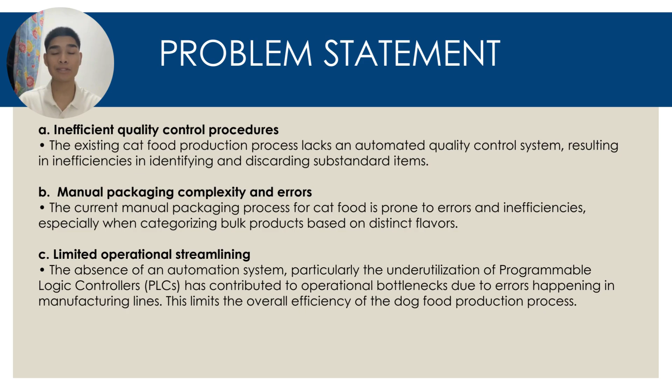Third is the problem of limited operational streamlining. There is a lack of automation, especially with the underutilized PLC system. This causes bottlenecks and errors in the production line, reducing efficiency and slowing down the entire workflow. Overall, these problems highlight the need for a more reliable and automated system to improve quality, reduce errors, and optimize the production process.

For this project, we have outlined several key objectives focused on improving the food production process using automation. Firstly, our goal is to implement PLC automation to control multiple stages of the production line, including sealing, quality control, labeling, and sorting. This will reduce human error and improve efficiency.

Secondly, we aim to integrate PLC technology into the packaging process, allowing the system to identify and sort food based on distinct flavor, categorized using different package colors. Third, we strive to enhance overall operational efficiency and safety, ensuring consistent quality across all output.

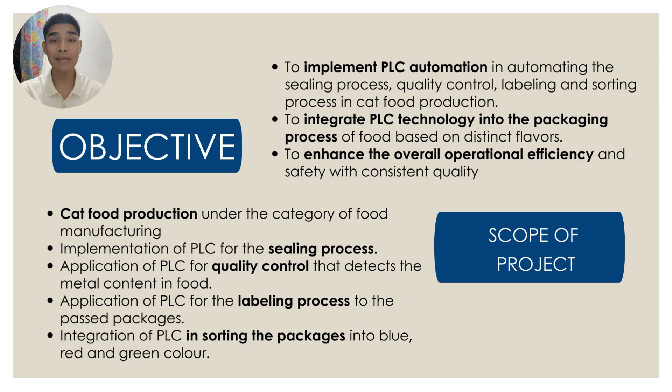To break this down further, this project falls under the scope of food manufacturing. PLCs are used to automate the sealing process to ensure freshness, and quality control is handled via metal detectors that identify any contamination. Labeling is automated for traceability and product identification. Finally, PLC assists in sorting the package by color, which is blue, red, and green, based on the flavor.

Good morning, everyone. Today I will talk about food packaging, quality control, and sorting systems in food production. These processes help keep food safe, meet regulations, and make production more efficient. Let's start with food packaging first.

Why is packaging food so important? Packaging is important because it protects food, plants, and medicines from damage and spoiling. Robertson (2013) says that packaging stops food from being exposed to air, moisture, and dirt. Without good packaging, food can go bad quickly and become unsafe to eat.

Most food packaging is made of plastic. Marsh and Bugusu (2007) explained that plastic is popular because it is light, cheap, and strong against chemicals. These qualities make plastic a good choice for keeping food fresh. But plastic waste is a big problem, so people are now looking for better options like biodegradable materials.

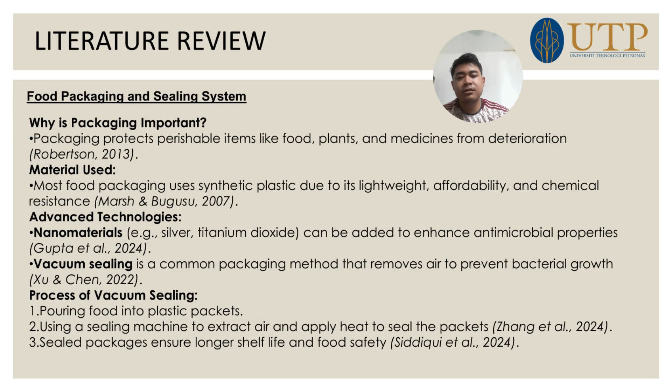Zhang et al. 2024, Siddiqui et al. 2024 say this method is used for many foods such as meat, cheese, and dry food.

Okay, now let's talk about quality control. Quality control makes sure food is safe and follows government rules. Early 2012 says this is important because bad food can harm people's health and damage a company's reputation.

In traditional methods of quality control, in the past, food was checked using physical inspection, chemical tests, and microbiological tests. Dora et al. 2013 explained that these methods help find contamination and check food quality. But these methods take time and can lead to mistakes.

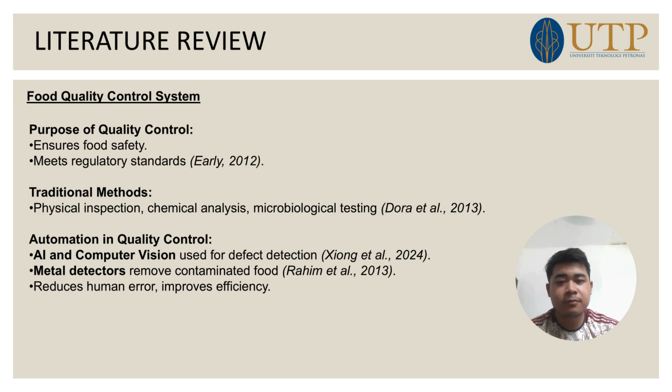For automation in quality control, technology has improved quality control. Xiong et al. 2024 explained that AI and cameras can now check food for defects. These machines quickly scan food and find problems like contamination or damage. Rahim et al. 2013 also mentioned that metal detectors are used to find and remove harmful objects from food. These automated systems make the process faster and reduce mistakes.

And the last one is food sorting system. The importance of food sorting system: sorting food is an important part of food production.

Yadav et al. 2019 say sorting helps organize food by size, weight, shape, and color. This makes sure food is packed properly and looks good for customers.

However, sorting food by hand is slow and tiring. Balogh et al. 2006 explained that manual sorting takes a lot of time and people can make mistakes when they get tired. So, to solve this problem, companies use machines to sort food.

Vandana et al. 2021 say photoelectric sensors help machines detect food colors, which is useful for sorting fruits and grains. Thirumurugan 2018 mentions that pneumatic pushers help move food into the right category. Fathahillah et al. 2020 also explained that PLC-based sorting systems make the process more accurate and efficient.

So, to summarize, food packaging, quality control, and sorting system are very important in the food industry. Packaging keeps food fresh, quality control ensures food safety, and sorting helps organize food properly. With new technology, these processes are becoming faster and more accurate. Thank you for listening.

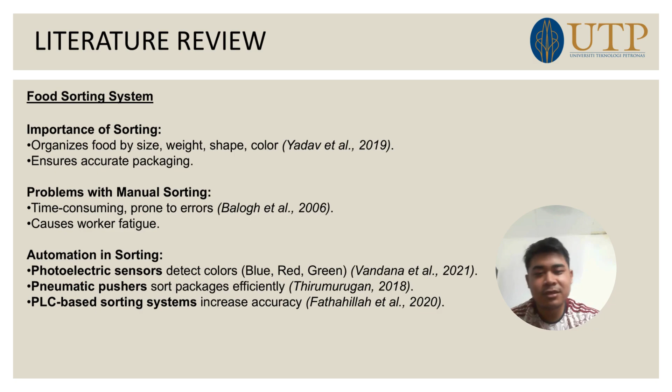3.1 Process Flowchart. First, let's start by looking at the process from the beginning. First is sealing. The conveyor belt moves the package forward, which is where the process begins. We check if the packet has already been sealed. If not, we move on to the next step.

The system uses a proximity sensor to confirm if the packet arrived correctly under the sealing clamp. If not, the process halts and the conveyor belt stops. Once the package is in place, the sealing clamp begins sealing the packet.

Meanwhile, the system checks if the packet contains any metal using a sensor. If metal is detected, the package is rejected and a pneumatic pusher pushes it out of the system. If the packet is free of metal, it proceeds to a quality check.

After a timer is activated for 2 seconds, a pass label is stamped on the package. Now, the package proceeds to the sorting stage where we classify the package by color.

The system sorts cat food packets into one of three different colored packages: blue, red, or another color. The blue pneumatic pusher is activated for blue colored package and the red pneumatic pusher activated for red colored package. A timer of 1 second is activated for blue package and 2 seconds for red package.

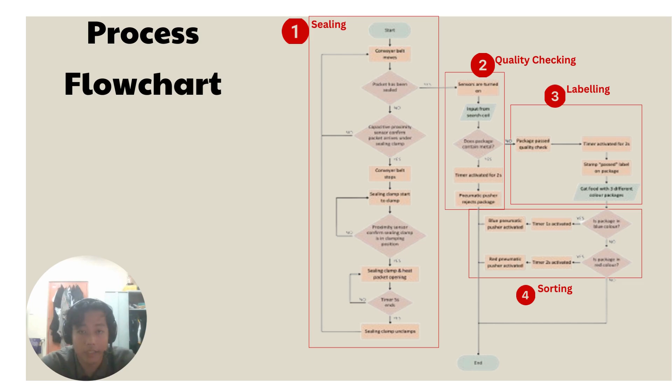Finally, if the sealing clamp confirms the packet has been sealed properly, it moves on to the next part of the process. If there is no problem detected, the sealing clamp unclamps and ends the process. If there's an issue, it is rejected and handled accordingly.

Required components and sensors. Let me explain the main components and sensors used in the cat food package sealing system.

First is the push button. This is the basic control for starting and stopping the whole system. It ensures that the operator can run the machine only when it's safe, and also stop it at any time when needed.

Second, capacitive proximity sensor. This sensor detects when a cat food packet arrives under the sealing clamp. It works by sensing changes in an electric field when the packet is nearby. It also helps to check whether the clamp is in a clamping or unclamping position.

Third, conveyor system. The conveyor belt moves the packets along the production line. It uses a brushless DC motor for smooth and accurate movement, making sure the packets stop at the right place and move at the right speed.

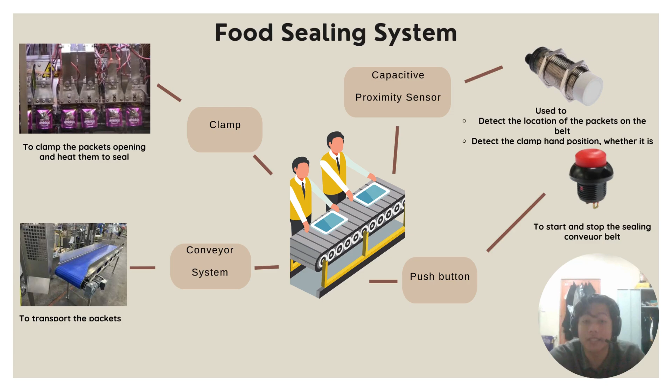Fourth, sealing clamp. The sealing clamp presses and heats the packet to seal it. It stays clamped for 5 seconds to melt and fuse the packet opening, then unclamps after sealing. This makes sure the packet is closed tightly to prevent any leaks. These components work together to make sure every cat food packet is sealed properly, safely, and efficiently.

Next, let me explain the key components and sensors in the quality control system used to ensure the safety and quality of the food products.

First, detection head. This part houses the coil and has an opening for the food product to pass through. It is built to be durable, resisting moisture, dust, and temperature changes, ensuring long-term performance.

Second, search coil. This is the main sensor. It creates an electromagnetic field and detects any metal object that interrupts the field as the food product passes through.

Third, control unit. The control unit processes signals from the search coil to detect metal particles. It manages the metal detector performance, ensuring precise detection of contaminants and efficient system operation.

Fourth, user interface. The user interface includes a display panel and a control button that allow the operator to adjust the settings, monitor the system, and make any necessary changes to ensure optimal operation.

Fifth, conveyor system. The conveyor moves the food products through the detection area where the search coil is located, ensuring each product is inspected for contaminants.

Sixth, pneumatic pusher. When the metal detector finds metal contaminants, the pneumatic pusher activates to remove the affected product from the line, ensuring only clean and safe products continue through production.

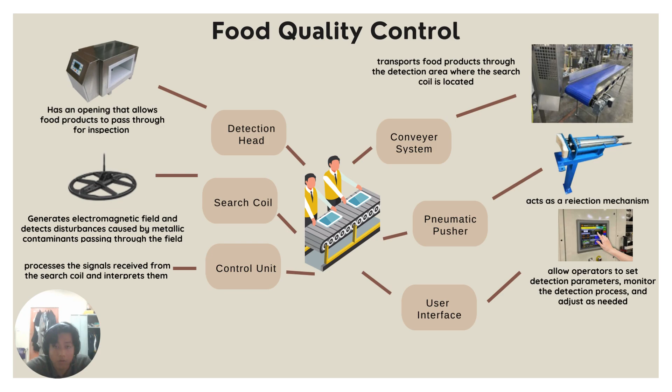Now, let's go over the components used in the label stamping system, which ensures that the right labels are stamped on the package. First, capacitive proximity sensor.

The sensor detects when the cat food package, which has already passed through the quality control system, arrives at the stamping point. It is positioned beside the conveyor right before the vertical pneumatic actuator.

Second, pneumatic cylinder. The pneumatic cylinder is positioned vertically and provides the force needed to stamp the label on the package. It ensures the label is applied correctly and securely. Together, these components work to apply accurate labels to the package, ensuring proper identification after quality control.

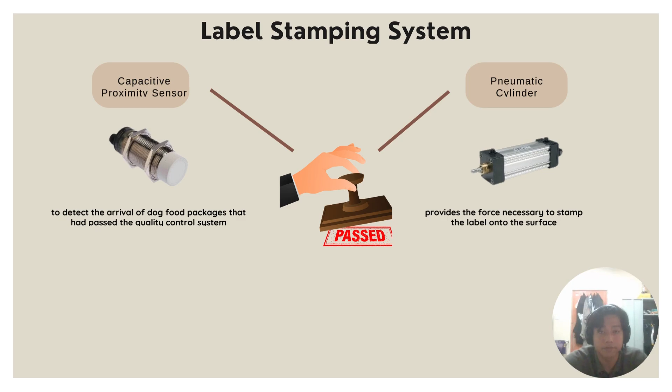Lastly, let's take a look at the key components used in the flavor sorting system, which sorts cat food packages based on color. First, pneumatic pusher.

The pneumatic pusher is responsible for transferring the blue and red cat food packages to another conveyor belt. It works using air pressure. When a sensor sends a signal, the cylinder extends to push the package and retracts with the help of a spring.

Second, DC compressor. The DC compressor converts energy into pressurized air. It increases the pressure inside the tank, and once the tank is full, it shuts off. When needed, the stored air is used to power different components in the system, like the pneumatic pusher.

Third, connecting pipes. These pipes are essential for linking all the components that use compressed air, ensuring that the pneumatic pusher and compressor work together smoothly.

Fourth, photoelectric sensor. The photoelectric sensor detects the color of the cat food packages: green, blue, and red. It works by emitting light and detecting any changes in the light as the packages pass by. This helps identify the package based on its color.

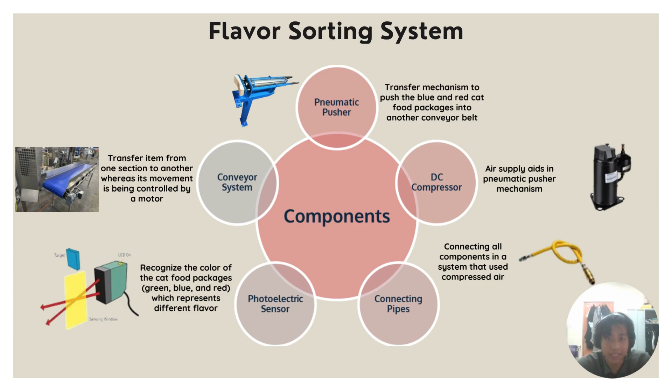Fifth, conveyor system. The conveyor system moves the package along the production line. It is powered by a motor, typically a brushless DC motor or a gear motor, providing reliable speed, energy efficiency, and saving space. Together, these components sort the cat food packages based on their color, ensuring that each package is correctly directed according to its flavor.

Next, this is the ladder diagram for our food sealing system. First, we turn on the start button, and the conveyor belt motor will be turned on as well. But even after we turn off the start button, the conveyor belt motor will still be turned on due to the latching system here.

Once the conveyor belt motor is turned on, the conveyor belt will start to move, and it will move the packets to the sealing station. Once the packet arrives at the sealing station, the packet arrived sensor will detect it and turn on. This will also turn on the clamp.

Once the packet is clamped properly, the clamp position sensor will turn on and heat will be applied to the packets for 5 seconds. After 5 seconds, the heat will be automatically turned off due to the heating timer that I preset earlier.

Okay, I will show you the demonstration. As you can see here, the heat will be applied. Then after 5 seconds, the heat will be turned off.

Simultaneously, the clamp will unclamp the packets and IR1 will be turned on, which will allow the conveyor belt motor to be turned on again and move the packets to the next station. This is due to the latching system here.

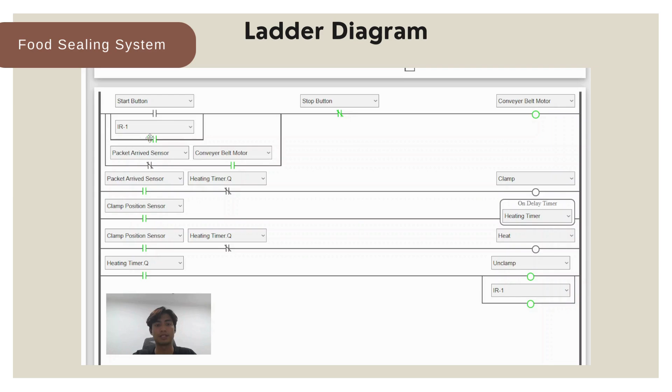The conveyor belt operates continuously from the sealing process, assuming that the rejection pusher is in a retracted state. When the search coils detect any metal in the packages, the rejection pusher will extend and a 2-second timer will be activated. After 2 seconds, the pneumatic pusher will retract back to its original position. The rejected item will be pushed to the scrap section while the passed packages advance to the next stage.

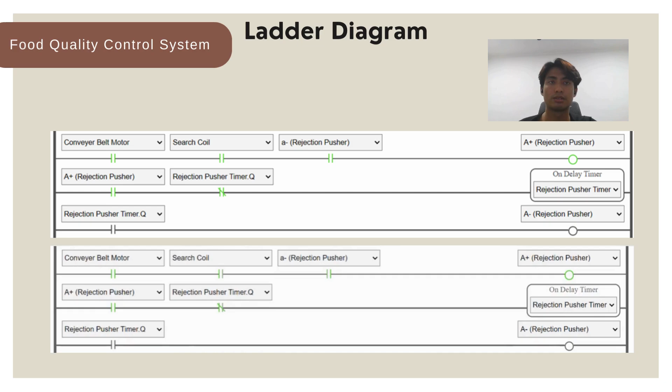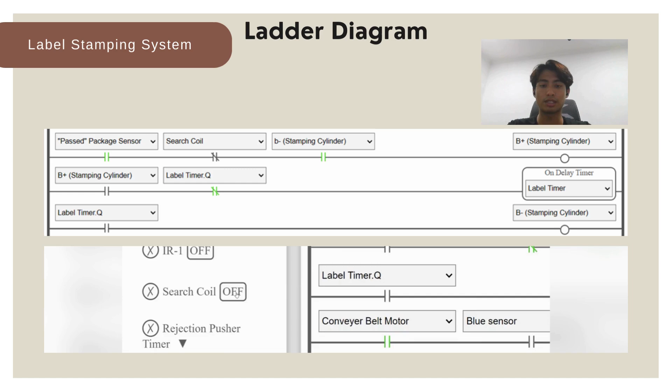Once the passed package arrives at the labeling area, the passed package sensor will turn on and the stamping cylinder will be extended. The stamping cylinder will extend for 2 seconds and the passed label will be stamped by the action of the pneumatic system. Once 2 seconds is reached, the cylinder will return back to its original position.

Next, the packages will go through the flavor sorting system. The flavors are sorted by their package color, which are blue, red, and green. The conveyor belt motor is turned on by default, and when the blue sensor detects any blue packages, it will turn on.

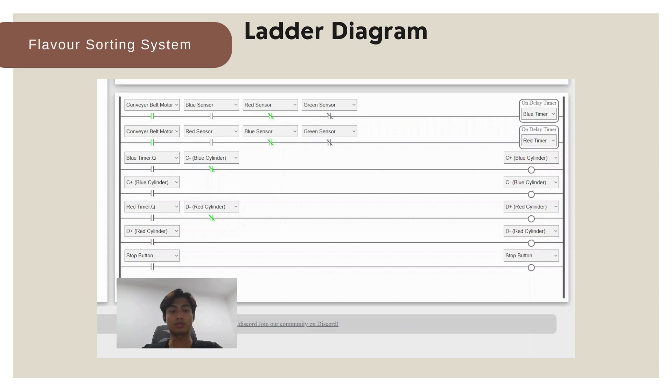For the green sensor, it does not utilize the other conveyor belt; it just goes straight using the main conveyor belt. To stop this system, simply press the stop button.

Today, I will be presenting an overview of a PLC-based quality control and packaging system for cat food production. The system is designed to ensure efficiency, consistency, and safety throughout the manufacturing process. It consists of four main stages: sealing process, quality check process, labeling process, and sorting process.

Now, let's go through each stage in detail. Stage 1: Sealing process. This process ensures that the packaging is airtight to preserve the freshness and quality of the cat food, and follows these steps.

First, initiation: when the start button is pressed, the conveyor belt moves the package towards the sealing area. Second, detection and clamping: a sensor detects the package arrival and triggers the sealing clamper to hold it properly. Heating activation: once the clamp is in place, another sensor confirms its position and activates a 3-second heating timer to prepare for sealing.

Sealing phase: heat is applied to seal the top section of the package. After 3 seconds, the heating element is automatically turned off. Next, unclamping and transition: the clamper releases the package and a sensor restarts the conveyor belt, moving the sealed package forward. Reset and continuation: the sensor resets and the system gets ready for the next package.

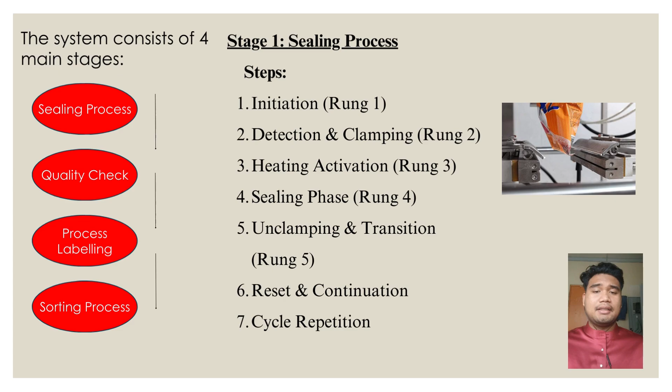And the last step is cycle repetition. This process repeats continuously to ensure smooth and efficient sealing operation.

Stage 2, quality check process. The quality check process ensures that no contaminated or defective product reaches the market. This is crucial in preventing health risks such as physical injuries and other health issues in cats.

The process follows these steps. First, continuous operation and detection: the conveyor belt moves the sealed package while a metal detector scans for any unwanted metal content. Metal detection and rejection: if metal is detected, the system activates a rejection pusher to separate the contaminated package.

Timed rejection: a 2-second timer ensures that the package remains in place before it is pushed aside. Package rejection and forward movement: after 2 seconds, the rejection pusher moves the package to the scrap area, while metal-free packages continue forward to the labeling process.

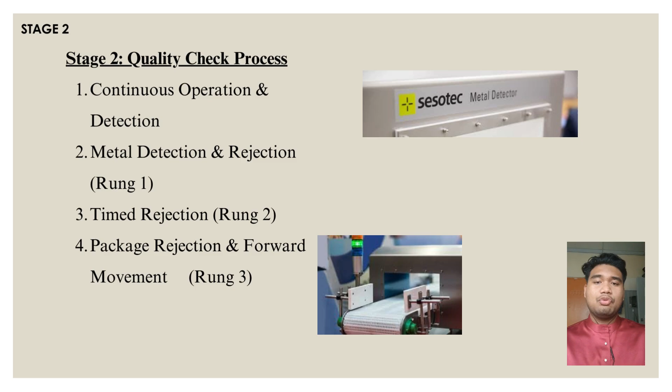Now that we have ensured product quality, we move on to the labeling stage. I will cover the next two steps in the next slide.

In this slide, I will explain stage 3 and stage 4. Stage 3, labeling process: in this stage, only packages that pass the quality check receive a pass label. This helps in traceability for audit and quality control.

The first step is detection and activation: a sensor detects a metal-free package and activates the stamping cylinder to prepare for labeling. Timed labeling: the cylinder holds the package in place for 2 seconds while the label is applied. Completion and retraction: the cylinder retracts and the package, now labeled as pass, continues moving on the conveyor belt.

Now that we have properly labeled the package, they enter the sorting process, or stage 4. Sorting process: this helps manage inventory and streamline supply chain logistics by categorizing packages based on different flavor or packaging colors. The sorting sequence is as follows.

First, continuous operation: the conveyor belt moves the package into the sorting area. Sorting by color: the system sorts packages based on preset colors - blue, red, and green.

Blue packages: a photoelectric sensor detects a blue package and starts a 1-second timer. After 1 second, pneumatic pusher 1 is activated to redirect the package to the blue sorting path.

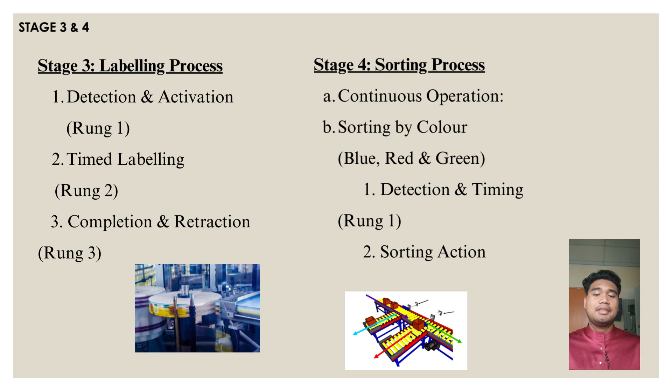To conclude, the PLC system in our project successfully automates several key processes in food production. The first one is sealing, which helps to preserve the freshness of the food and extends its shelf life. Next, quality check: a metal detector is used to identify and reject any contaminated package to ensure safety.

Next is labeling, so a pass label is applied for traceability, so only safe products move forward. Next is sorting: using a photoelectric sensor, packages are sorted into blue, red, and green color based on the flavor. These automated steps help maintain high product standards and a smooth workflow throughout the production line.

So now, for our recommendations for the system: the first one is we suggest regular maintenance of sensors, actuators, and the system as a whole to keep everything running smoothly.

Next, a proper error handling procedure should be implemented to manage jams, faults, or other disruptions in the system. Lastly, continuous improvement is very important.

We recommend regularly reviewing and optimizing the automation steps to boost productivity and reduce waste. Also, operators should receive staff training to ensure they are capable of handling the system and performing any necessary troubleshooting.

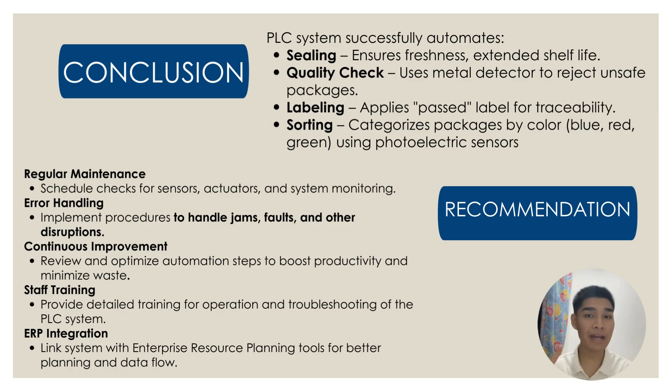Lastly, we recommend integrating the PLC system with ERP software to streamline data flow and enhance production planning. By applying these improvements, the system can reach an even higher level of efficiency, consistency, and safety.